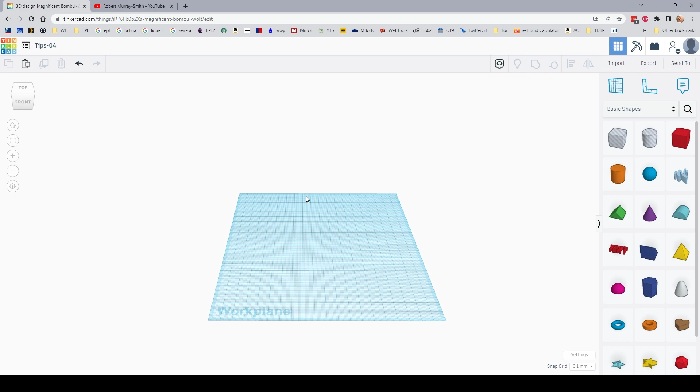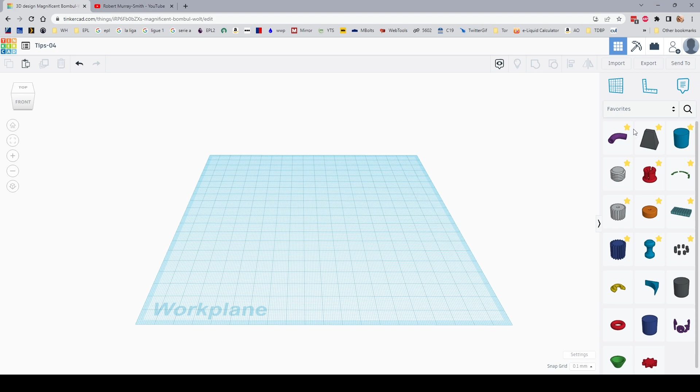So in his video, Rob was working on updating the Darrieus wind turbine - really cool video, by the way. There's at least one shape that can help you out, two really, and I've got them in my favorites. I'll show you the names so you can search for them and find them using this right here.

So the first one is going to be the high resolution tube funnel. I'm going to make one and put it there. The second one is simply called tire. I'll make one and put it there too, and they look pretty much like they're named.

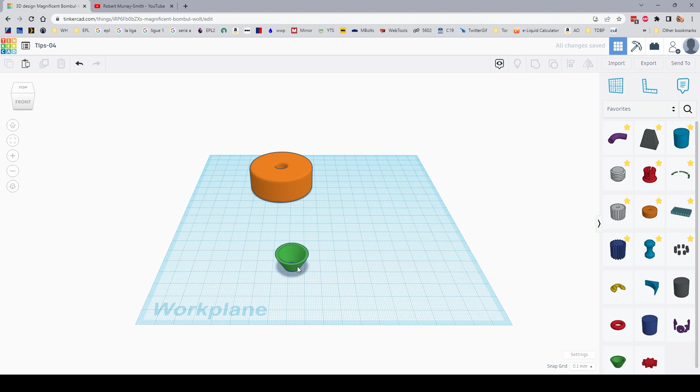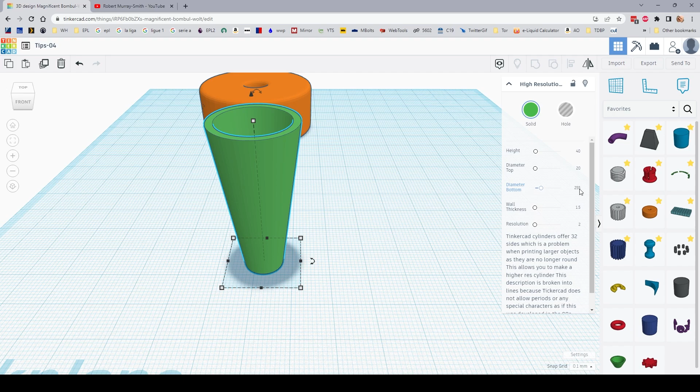Okay, so for this one I've already done the math and I know what these dimensions are supposed to be, so I'll run through those - it's the other things about it that I really want to show you. Height, we're going to make this 40. The bottom diameter, we're going to make this 255. Top diameter, we're going to make this 275.

And the wall thickness - this is important. Even though you can go more narrow, you really shouldn't go below 2 millimeters if you can avoid it. Really, 2 millimeters is kind of optimal for printing walls, unless you need something ultra sturdy. Any thinner than that and it's a little iffy. Okay, so that's it for this guy.

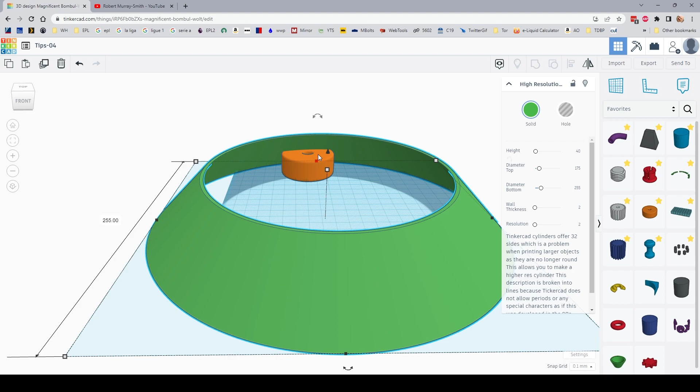All right, now let's move to the tire. Just bear with me, this will make more sense when we get it done. The edge radius - you see how smooth these edges are? That's useful in some situations, like if you wanted to make a tire.

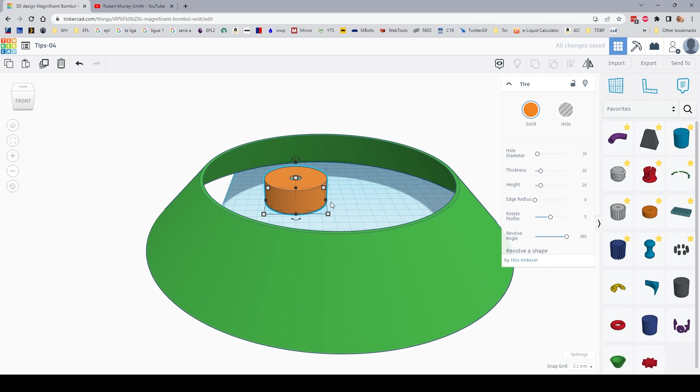We don't, so I'm just going to turn that to 0. It will cause problems if I don't. Now you see you get nice clean edges, nice pretty sharp edges. Let's see, what else matters?

No. No, let's go with that. Okay, this will matter, but not right now.

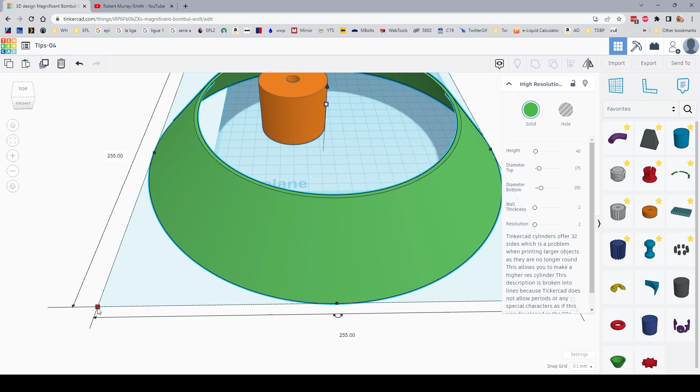Okay, this is 255 both ways, 40 high. So we're going to go a little bit bigger with this guy - it doesn't matter, let's just go 260, 260. All right, there's a little tip right there.

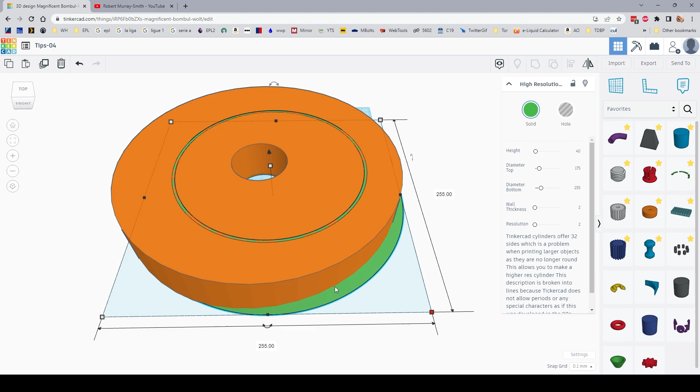Something that, if you're looking to adjust X and Y on something - Tinkercad kind of assumes you're going to want to do that. So as soon as you click in one and type in a number, a dimension, you can hit your tab key to go to the next one, and it's going to take you to the opposite one. Type your dimension, hit enter, and you're done. So if you want to do X and Y, that's a quick way to do it.

All right, back to this. Okay, so we got two things, and they're sized well - this tire is a little bit bigger than the funnel.

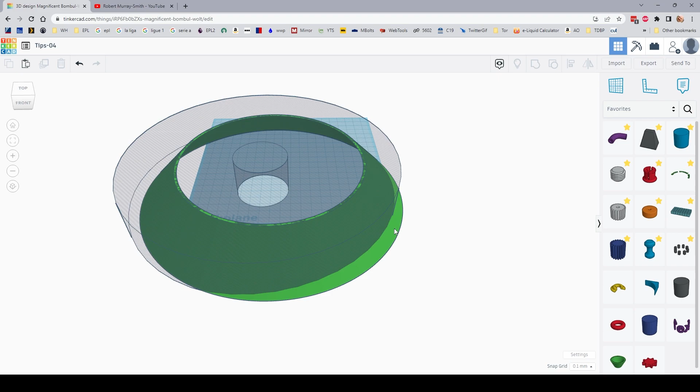Now let's turn the tire into a hole. Essentially what we're going to do is use the tire to take away the vast majority of the funnel. But the first thing we need to do before that is align them. So I'm going to select them - you can click and drag the things you want, or select one, hold down shift, and select the other.

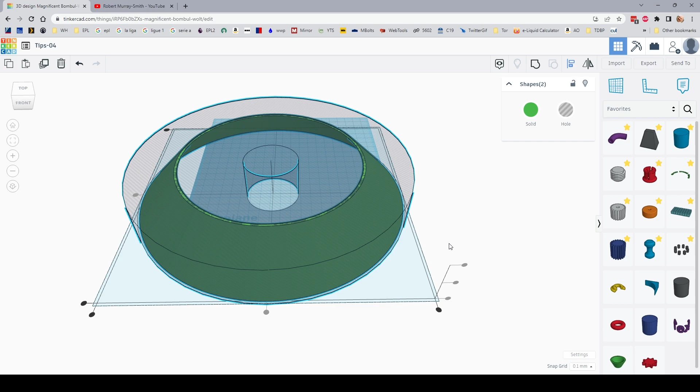Now I'm going to align them, so I'll hit the L key. In this case it doesn't really matter, but let's say I wanted the funnel to be the stationary piece - I would click it, center it this way, center it this way. And if they weren't the same height, you could center them top to bottom to make sure you got good coverage to erase that part. Okay, so that looks good.

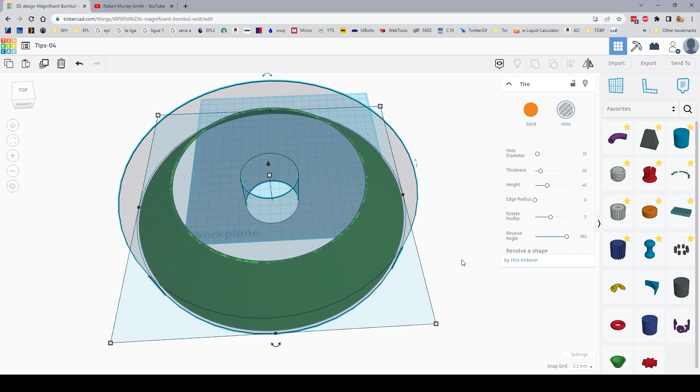Here's another tip. If you trap yourself like I just did and want to click on that funnel, but the first thing your mouse comes to is the tire, here's what you can do: select it all, hold down your shift key, and deselect the tire. That leaves you with just the funnel selected. So if you get trapped like that, select it all and then hold shift down to take off the other things.

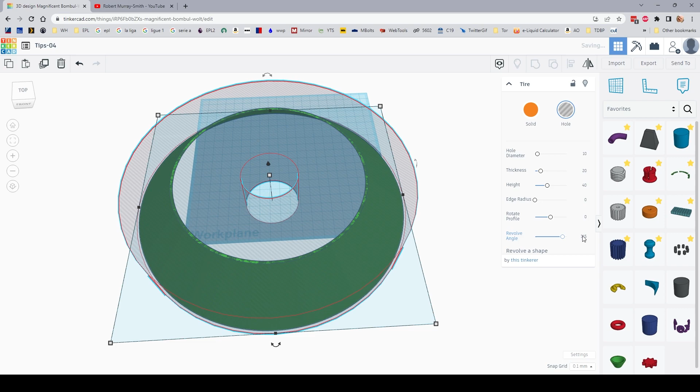Alright, so I've got the funnel selected. Oh no, I wanted the tire. I'm crazy. Alright, so we want to make this 315 degrees because we're going to take off the vast majority. We want to leave 45 degrees, that's what we're trying to do here. If you turn it around, it makes a little more sense. So it's starting to look like the piece that Rob designed.

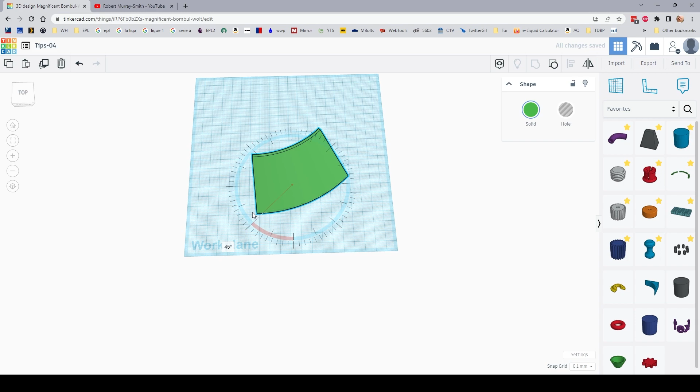I'm going to select those and Control G to group them together. I'm going to move this up, rotate it just so it's nice and flush. Okay, so that's what the piece looks like so far. We've got nothing sticking under the bottom, it's just nice and flat. That's the advantage of using the top and the bottom diameters.

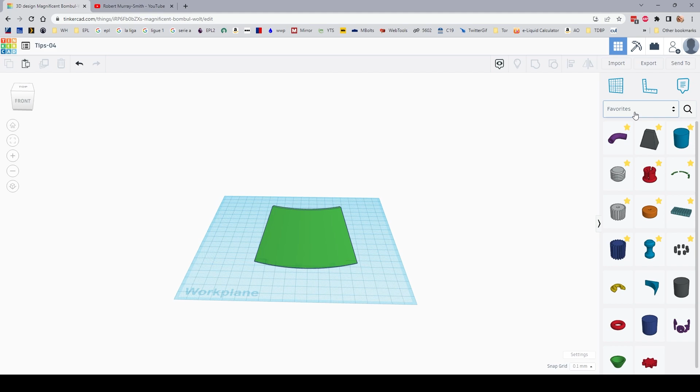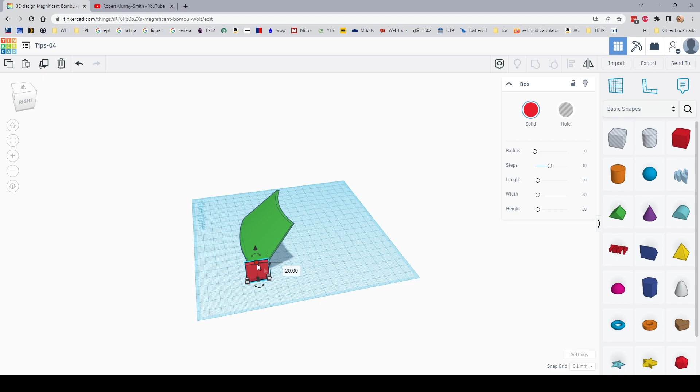Okay, so we need a couple of wing pieces to go on the sides. I'm going to go back to my basic shapes and just make a few. Now Rob made them 3mm wide, and I'm going to match this for the other dimensions. So we're looking at 40 high, about 48.5 deep. All right, 40 high, 48.5 deep. Okay, but oh crap, look, they don't line up.

So what we're going to do is get some nice flush faces. Now we're lucky in this case because angles are our friends. We're going to take this, drag this handle 22.5 degrees, and you can see that gives us a nice flush face right there, right? This will mate up to that nicely.

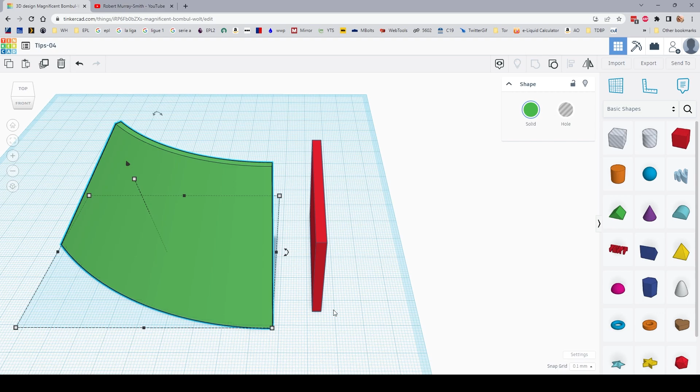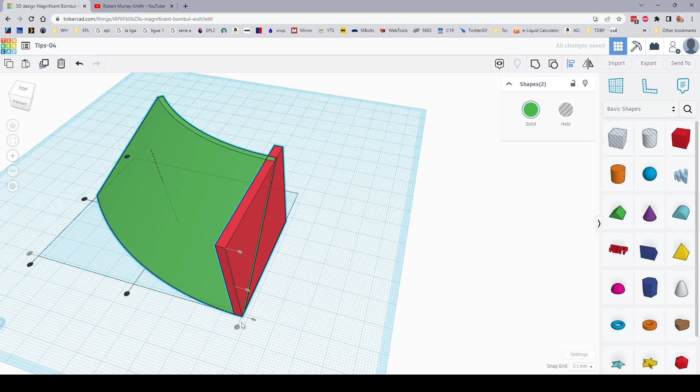Alright, so let's start our first alignment, and it's just going to be a rough alignment. So if we select them both, hit the L, we want to align them on this back line, and we want to align them on this line. So that gets us really, really close, right? We really kind of wanted it to align right here on this corner, but that got us close.

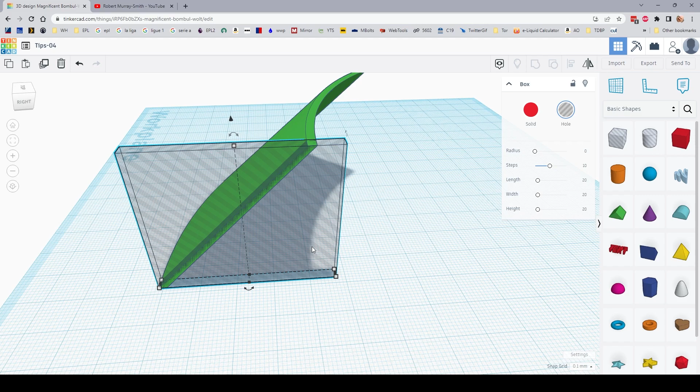So what we'll do, we'll select the one, and here's a pro tip: turn it into a hole temporarily, and that helps you see through it. Make sure you got your granularity turned down to 0.1, and we're going to nudge that backwards and zoom in on that corner so that we can see. There we go, so that looks good, really good. Alright, I'm going to turn this back into a solid like it should be. Now notice something: when two edges are mated up like this, you'll see in a perfect world a kind of hash right there, and that means you're spot on.

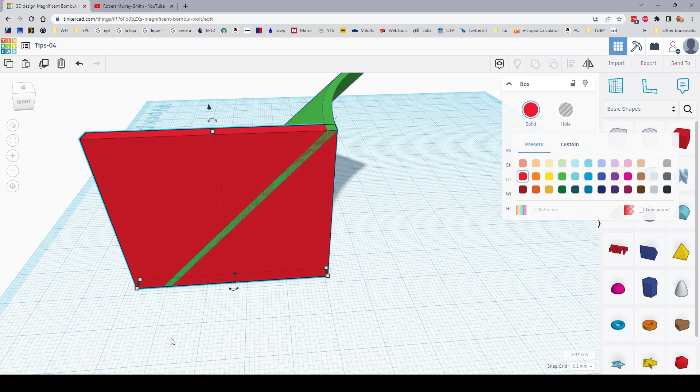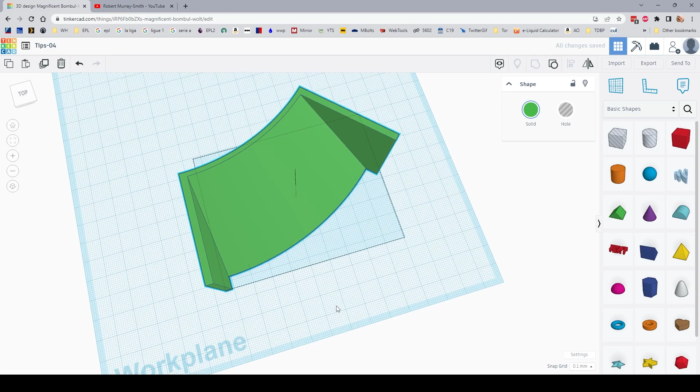Okay, let's zoom out and let's do the other side. We're going to select all of this and Control G to group it. And there we go, we got our nice fancy piece.

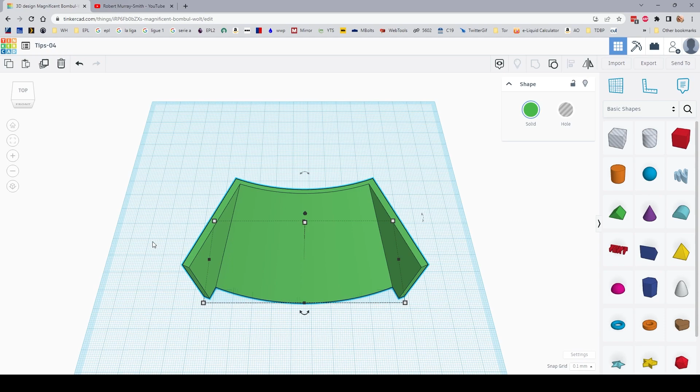A little bit different way of making things, using a little bit more advanced shapes, and using the alignment tools as opposed to using the rulers like Rob did. So neither of those methods are wrong, you can use the rulers if you choose to. I almost never use them, I use them from time to time, but almost never. I like to align to pieces rather than to the grid, it's just a different way of looking at it. They're both good, solid methods. So look at what Rob does, look at the methods that I've used and play around, and you'll come up with your own method.